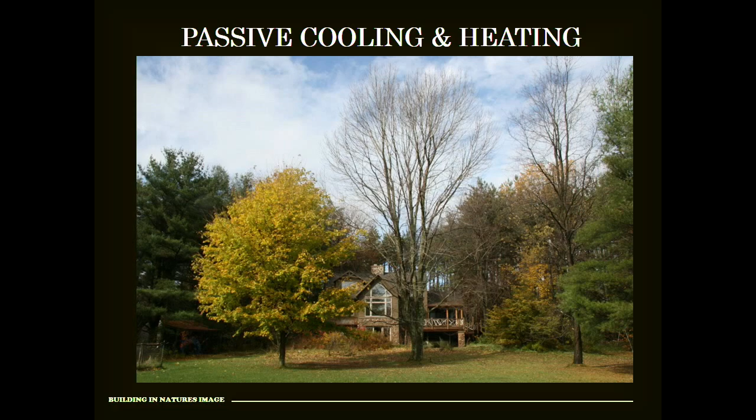We get to the point where you can see the green ash in the middle, and I'm sad to say I lost my good friend, this green ash tree that's been with me my entire lifetime there - it went the way of the emerald ash borer. I did everything I could to protect that tree during construction, but he's gone. For reasons unknown, how quickly they're moving and from what direction, but we're told now the emerald ash borer skipped over the Hudson River probably 15 or 20 years ago. We're just seeing the impacts of it now.

At this stage in my house, when I was living in it, I was 17, 18 years without a heating system. The sun heated and cooled my house, both. I had a wood stove, that was it. I was operating at about $1.17 a day electrically, but I wanted to do my part and say that my house is zero greenhouse gas emissions.

Just a few years later, I had the opportunity to put solar panels in. This is down around the corner, a remote location from my house. It's a 7.2 kilowatt system. It was $32,000 with the federal tax and state tax incentives, I got it down to $16,000. I did a lot of the work myself, so for about 11 grand, I'm in the game. I was close to net zero for quite a long time, and now I'm net zero.

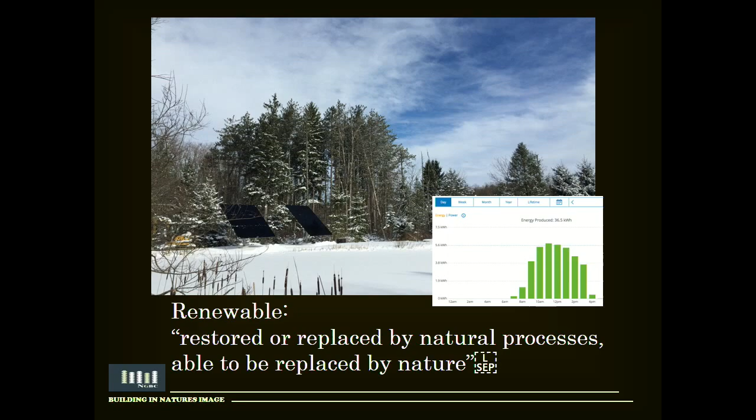So renewable, what do we know about renewable? It's restored or replaced by natural processes, able to be replaced by nature. Here it is the day after - zero production, right? So we really can't rely on it. I go down there and made up a special implement that I can clean the snow off, but there are days you don't really want to go down there, a day like this morning, but I do.

Imagine that on my rooftop and the rooftops of everyone else's house, we really don't have an opportunity to go up and clean the snow, ice, dirt, debris, bird droppings, or whatever falls on them.

So my house is net zero. I have my utility bills that prove it. I can prove it, I feel very good about it. But still, at certain points with net zero, I'm actually drawing from the grid during peak power production. My house will draw from the grid, even though I give back more than I take, at a peak time, so I don't reduce the capacity at the power plants. It's not having an impact there because of the certain times that I draw it.

So a whole different mindset's got to be ingrained in us when we're going to operate things and how things are actually going to be transformed. You know, my system's pretty good.

One of the things I've heard quite often in the green building movement is that most people don't like the looks of solar panels. So I made a point to use SunPower panels. They've taken all the diodes out and put them on the backside so they produce more, and they're clear, sheer black, with no patterns within them. So I oriented it right. I've got the reflection off the pond, cooling on the backside to keep them cool. The orientation, I can move them any way I want. And for maintenance, I can go down there and pull the snow off. To me, that's aesthetically pleasing.

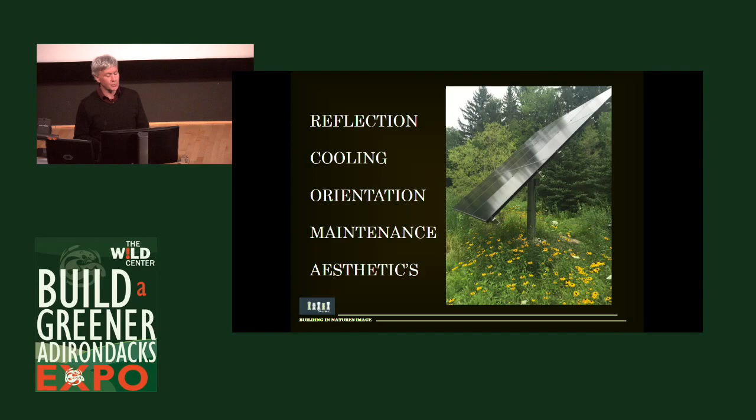But are they made properly? When we go back to 9th and 10th grade, learning about the periodic chart, we were told which areas to stay away from—lines 3 through 6 and 14 through 16—because these are the toxic elements. Stay away from these. But this is what we're making our panels out of.

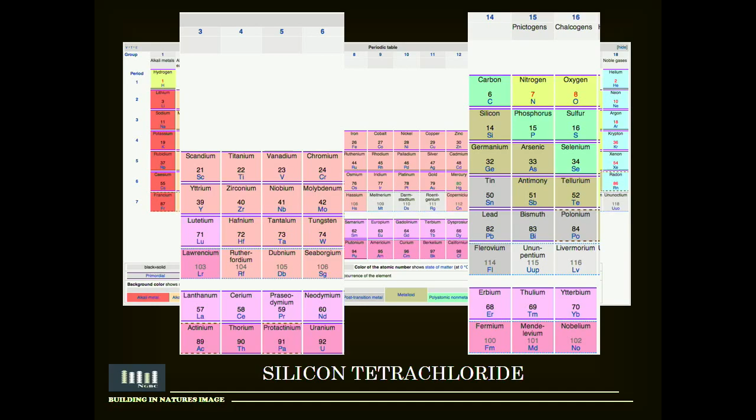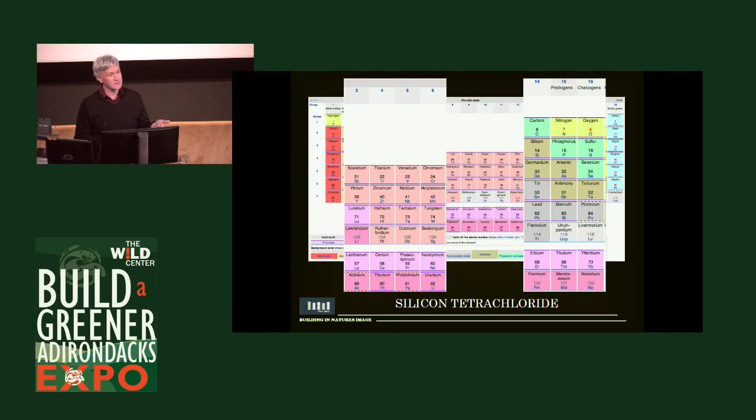Silicon tetrachloride is the byproduct. It's a very easily recoverable product, but it's extremely toxic. It reacts violently with water, and it only stays out of our water system if environmental regulations forbid it. Where the majority of solar panels are made today, there are no environmental regulations, so it is getting put into the waterways. And the way things are moving here in the States, if the EPA starts to be detracted from its main task, we may see it happen in the U.S. as well. So my solar panels certainly didn't come from the U.S., unfortunately.

So is net zero sustainable?

This is my daughter Jill. So Sally, this is Jill. We were talking about her this morning.

Jill spent 9 years in Hawaii. I just went over to move her. At the last of her time there, she was chief nurse at the largest capital improvement project in Hawaii, and this is it on the right—a mass transit system. It was sold to the public, funded by the federal and state governments at high levels, because it was going to bring the islanders in from the center of the island down to the downtown city, so there would actually be a benefit for them.

So when I went to move Jill from Hawaii to Portland, Oregon, we had a leased vehicle. The easiest way to get rid of a leased vehicle on an island is to try and sell it. We did it, took a little while. The third person who came was an older couple in their late 50s, who had never left this one island, not even to go to the other islands.

We were sitting on a park bench one day waiting for a leasing company to call us back, and I said, it's got to be really great to have this mass transit system—you live so far out, it gives you easy access to the inner cities, right? And they said, Kevin, over in Hawaii, they talk story, right? So you learn that very quickly—there's not a quick conversation, it takes a while. So for the next 20 minutes, I heard about their mass transit and the fact that it wasn't meant to bring them in from the inner islands down to the city.

So I started looking into this, and it's the first time I learned what the duck curve was all about. March 27th of that year, 2016, the largest solar farm in the United States had to shut down because the grid couldn't handle it.

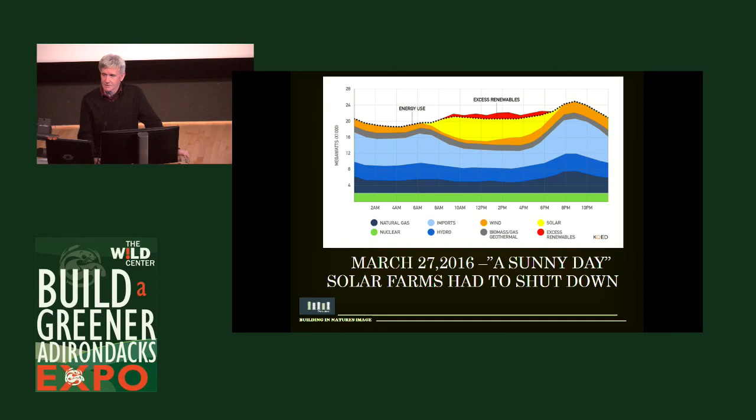So you start to say, okay, the island, they can't take their electrons and share them with other states, but we can in the United States, right? Well, maybe, right? Let's look at the duck curve, and this is what it is.

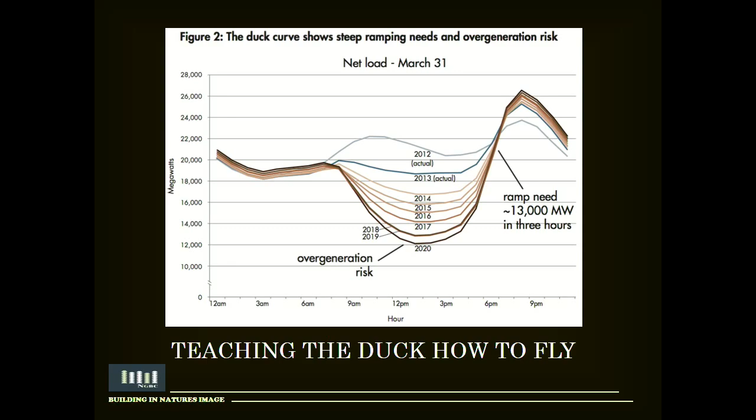There's an 8,000 megawatt ramp that comes when we wake up in the morning. You can see where the renewables take off, essentially when the sun comes out, from 7 to 3:30, somewhere in that range. Then it's got to ramp up by 13,000 megawatts as we all come home from work and turn our lights and computers and air conditioners on at home. And then it's got to shut down again. Well, our power plants can't ramp up and down that quick. So as electricity starts to take over, unless we teach this duck how to fly and flatten out, we're always going to be overproducing, which is an adverse impact on the grid. The grid just simply can't handle it.

And the reason they can't share - look at states like California and Oregon, where my daughter Jill moved to, they're zero coal. They want to be off, and they're 0.2% from getting there, and their goal is by 2018. So less than a year from now, they're legislated to go zero coal. The minute they share their electrons with PacifiCorp, who operates in the states of Wyoming, Utah, and I forget the third one over there, the minute they share, they're 60% coal. Electrons go both directions, right? So the minute they share, they can't meet their zero energy goal of zero carbon. So that's it in a nutshell about why the grid is not ready for us.

So the global impact of the built environment - we are truly global. One of the things I learned talking with the older couple, in their late 50s, was they were begging for the westerlies to come. It was three weeks late that year. Not only that, but the humpback whales were three weeks late as well. So finally, when the westerlies come, they blow all the humidity away, and then they plant their crops.

Well, what else comes on the westerlies in the state of Hawaii right now in a day and a half? All the black carbon from China. Two days later, it hits our west coast. Right now, it's fastly approaching 30% of the pollution on the west coast coming from China. When I hike up Whiteface here, they have one of three monitoring systems, I believe, in the entire world, and they can track how much coal we're burning in the Ohio River Valley in 3 days, and in 3 weeks, they know how much coal China's burning.

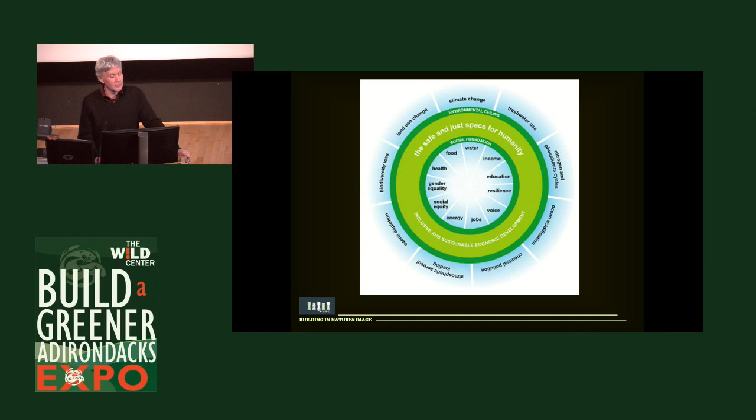So how do you do it? How do you get and stay in there? Well, we learn from traditional ecological knowledge, and we're actually starting to integrate this into our universities now too, where they're starting to understand traditional ecological knowledge has the same footing and should be on parity with scientific ecological knowledge.

From the stars, the 7 sisters, the Pleiades star system - long time ago, the Peruvian farmers every 4 years climb to the highest peaks. They literally look 400 light years off into the distance. And they will plant their crops and select which crops to plant based on how light or bright the 7 sisters are. So our scientists say, well, how do you do this?

How do you predict weather so accurately? So for 5 years, our top scientists went to these Peruvian farmers, and they followed them and tracked them. And they found out that they were actually predicting El Nino, something we've only learned about a couple decades ago. They've been doing it for 400 years. Ice crystals in the air is what's giving the brightness or obscurity of the Pleiades system, and that's El Nino - that's what our meteorologists track now to give us our weather predictions.

Because I missed one - Fukushima, right? So more traditional ecological knowledge. The hieroglyphics on these stone monuments that surround Japan have been there for 800 years. And when you translate them, it says: remember the calamity of the tsunami, never build below these monuments. 130,000 people did, and we all know the story of how that ended. So they knew this - sometimes it's what we forgot. It's already been known.

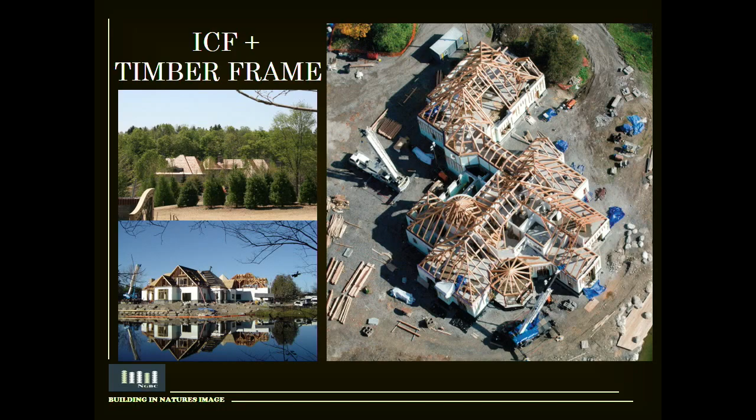So here's one of our projects. This was really a pilot project for a mall that couldn't get funded. So a good storyline here, right? How can we actually build something virtually and prove to the financial institutions that it can come in on budget and under schedule?

So it was a 17,975 square foot building. We were tasked with building it in less than a year, on budget. So we built it virtually. There were no paper plans allowed. Everything had to be done on the computer. Each of our guys went around with little iPads to do their work. And this is what we came up with for a system that was fast-paced and could actually operate at near net zero.

So what we took is we built an ICF structure, and we actually placed a timber frame structure on top of it. This building, the last utility bill I saw was - we didn't want to have natural gas there, but the owner insisted on it for cooking purposes. Her monthly bill for natural gas was $7.89. The monthly electric bill was $179. And I think you guys are fully aware of the service charge and transportation of our energy. So the actual electric usage for what you use is way down below $100.

For a 17,975 square foot building. So a lot of things we came up with - urban legends, I call this one - because as we start to move into the urban environment, you know, Paul Hawken came up with a great saying.

This is less than a year ago. He stood in front of a large audience and he said, before each and every one of us goes to bed tonight, 180,000 people have moved into the inner cities. That's us. That's in the U.S. And it's happening in Syracuse, New York. I see it. Every one of our old buildings is getting repurposed where we used to actually build things. We're putting people inside these places right now. 180,000 people each and every night, and this is happening.

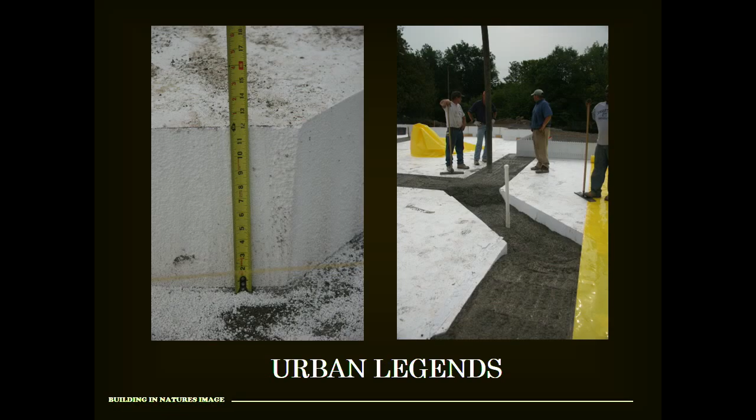So as we start to build in the urban environment, we're starting to actually see urban soils. So this 17,000 square foot house was on a brownfield site that we took down, but because we had urban soils there, we didn't know what it was. We had unstabilized soil down to a depth of 9 feet in some areas. So we had to excavate it out, bring structured fill in, put it in 8-inch lifts, have a structural engineer do the compaction testing for us.

So as we start to get up towards the surface, I started to calculate all the fees involved there. And I said, you know, I can actually put foam under this house that'll be not just for insulation, at less cost than I can put structured fill under this house. And I can start to begin with this concept of floating houses. And yeah, something as big as 17,000 square feet that was all concrete, we can float quite easily.

But what we came up with as well - if I can buy for $4.20 a square foot a foam block that's 12 inches thick, I can actually make all my footings out of it. And golly, you should see what the guys had to say when they came home at night and their knees weren't sore, because they're actually crawling around on foam, not on the hard ground or in gravel. So we actually set these foam blocks in place, laid out the footings. These are the spread footings here I'm showing you. Cut them out with electric chainsaws, take the waste and grind it back up for recycling.

And actually poured our concrete. This was a difficult project for Josh and I - we had a pretty hard-driving owner who wanted this done on budget and in less than a year. As he watched 18 masons drive off with their trailers full of wood formwork, he saw $14,000 of the budget go away with it, because we actually poured these footings in less than 4 hours. It was that quick - we just set the pins, snapped the lines, cut it out, and poured concrete.

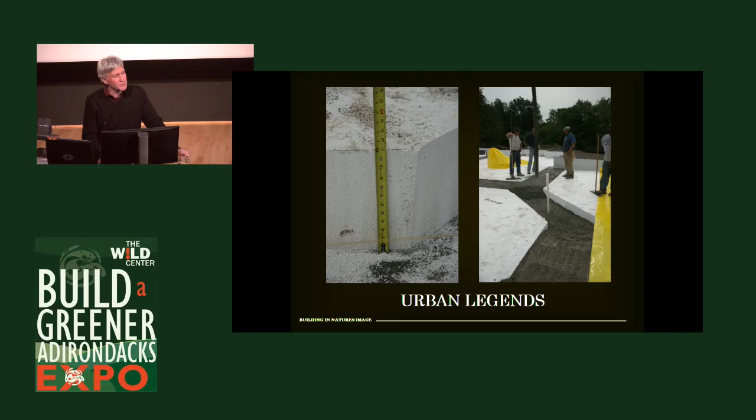As we're pouring the concrete and the spread footings here, we're ready to pull the gas-impermeable vapor barrier on top of it. And that afternoon we were literally laying the hydronic heat pipes in the concrete to be poured that evening. So we were moving at a very fast pace, and this was less expensive than bringing the structural fill up.

Here we are at the peak. So the thing you really look for here - if you can see this area, we actually took the 12-inch SIPS panel, and over on this side we're putting offset brackets so our overhangs are offset for the structure. So we literally married the ICF structure coming up with a 12-inch SIPS panel coming down. They came together - you saw what we did underneath with 12 inches of foam.

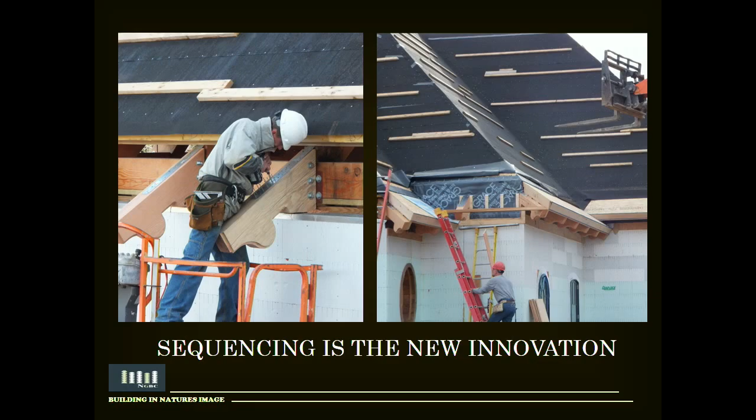We used a Quad-Lock system where we actually placed another 4 inches of foam in the ICFs, giving us a wall assembly of R43. We poured our concrete inside that, then married that wall system to a 12-inch SIPS package. So we literally enveloped our entire building and exterior skin with its insulation package, pretty much like a Golden-crowned Kinglet. And a house that's close to 18,000 square feet is operating at net zero.

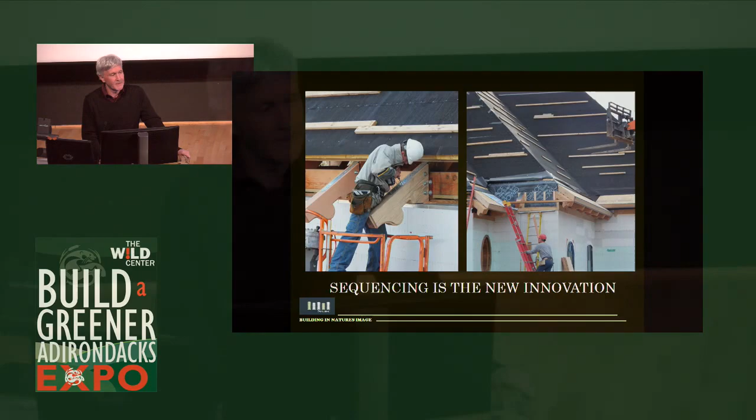Our blower door testing alone, we're at 0.76 air changes per hour in this big of a house. And the keys were looking at stuff like this - integrating it so there's no breaks in it at all.

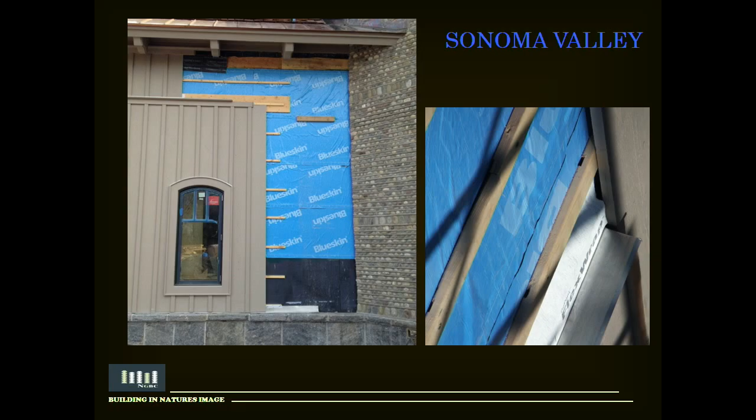This slide's pretty special to me because I went to Greenbuild in San Francisco maybe 5 years ago. At the very last minute I decided, Kevin, you're in the Sonoma Valley, you're not going to go for a wine tour. So I signed up, found out they're all busy, and got some guy for like $79. He showed up in an old Volkswagen van with a tape deck playing. I'm thinking, what am I getting myself into here? The first place he took us, there were 2 Canadians in the back seat, 2 people from Michigan - we're talking Green Bay Packers against the Minnesota Vikings, fighting before their first glass of wine. I'm sitting in the front seat with this knucklehead, and he says, yeah, I used to play in a band on the Mike Douglas show. Sure enough, there he is on YouTube playing. I go, what happened to this guy? So anyhow, we pull up to this small white house, and who would have known it's a vineyard? Out the door comes a 25-year-old lady in very short pants, because the people in the back seat let me know all about that very quickly.

And I'm thinking, all right, what are we going to learn in this and what the wine's going to be like? Oh my goodness, I've never had such an education before in my life in such a short time.

She came down and the first thing she said was, I want to show you our vineyards. They're only 1.5 acres, but as they go from the base of the mountain they rise up over this field, and she's pointing them out to us. We go through 28 climate zones. I think to myself, the EPA says there's only 8 climate zones in the entire U.S., and she's telling me there's 28 climate zones in that 1.5 acres of vineyard.

When they pick their wines from the lowest vine to the top of the vine, as it comes up and over this very gradual slope, it amazed me. And it taught me two things. It taught me that, golly, we look at different orientations of our buildings in a horizontal direction. We've never thought of a vertical direction. Well, here we are, right?

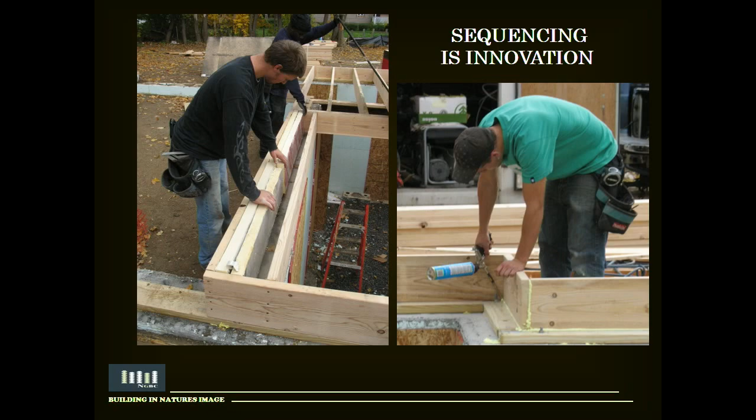And we get to learn things like this, that until we start to change the way we think about things, you know, sequencing is the innovation, right? So our framers need to be the air sealers. They are the people there in place that see it and can seal it. It's not the air sealing contractors and insulators who have to come in afterwards and find these outrageously expensive products that are off-gassing at times if it's not installed right. But there's times when they can't get into these areas as well to seal them properly.

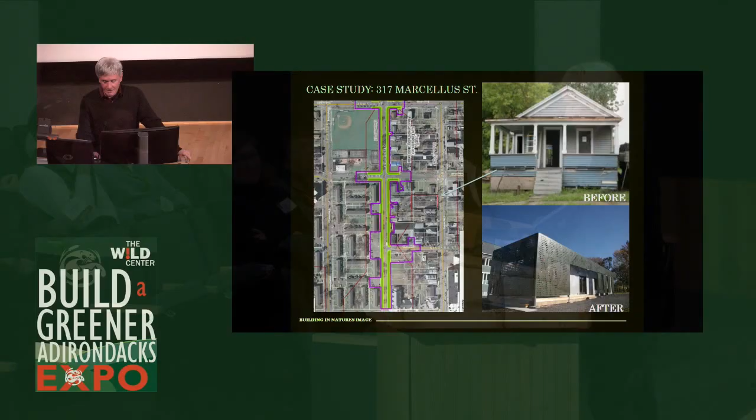But I'd like to introduce you to a case study here. This is 317 Marcellus Street. I think we end at 10 o'clock, is that right? Okay, so I'm going to speed up a little bit here.

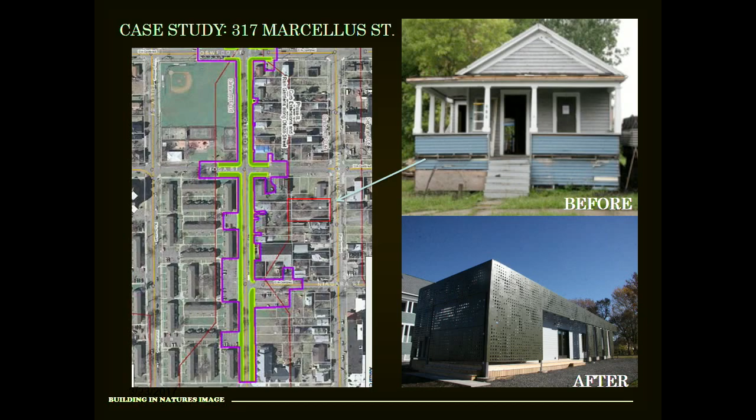So the case study is this house on the upper right. $41 million went into this near West Side neighborhood. It was to reimagine, reinvent, revigorate, whatever you want to call it. It's the before and the after. The after is on the bottom here. It shows where we are in this inner city, and it shows a new way of getting to that net zero. So the ecological deprivation, degradation, and social deprivation - how do we fit in there? Well, let's go back in time before we get to pre-European settlement.

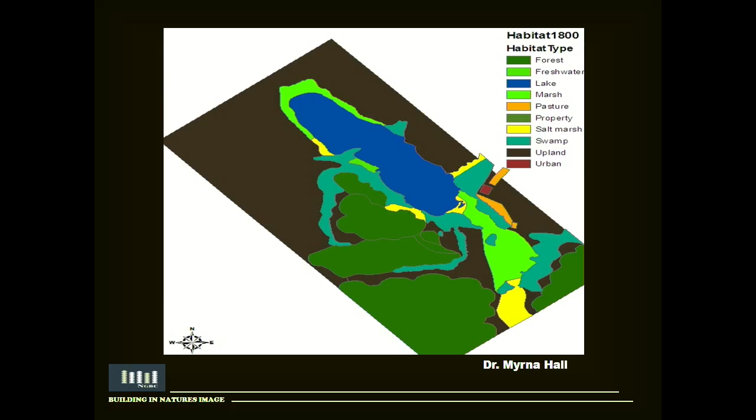We go find these old maps. We get these from the Historical Association, sometimes from the local colleges who have this stuff. We locate where the house sits. We go back up to the colleges. We locate these old vegetative maps done from scientific and traditional ecological knowledge. So we're tapping into the history of our ancestors here for answers.

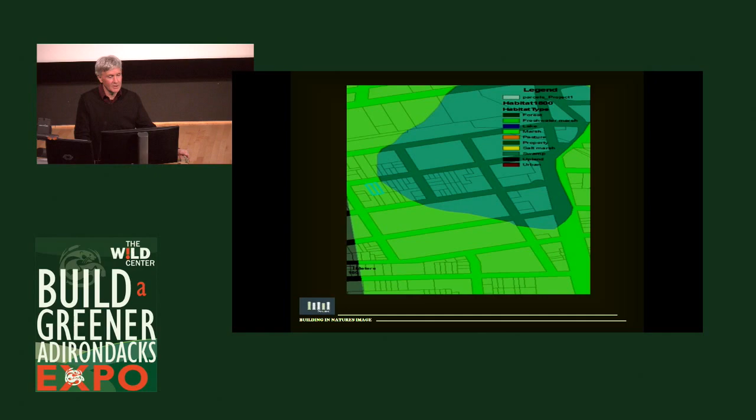We overlay both maps, the street grid with the vegetative grid, to understand what the performance is. We create an algorithm of what those performance metrics are from water, carbon, soil, albedo, solar. This screen would have to go clear across the entire screen to show you the complete algorithm, but I put the high ones out there. So we identify what was sustainable on that site before we put a house there.

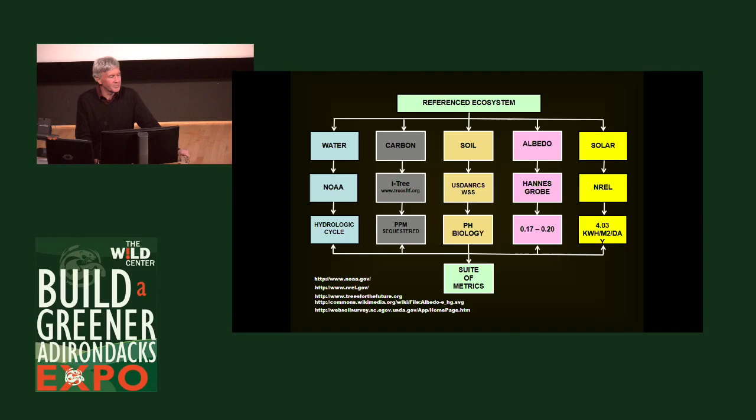How do we do it? There's a new tool that Dow Chemical actually came out with. They partnered with Nature Conservancy. It's called the ESII tool. I put a YouTube link at the top and it shows you how to do it. It can actually go on site in real time and tell you how that ecosystem is performing.

And if we can create a house that performs to the same standards of the ecosystem in which it's going to live, we're inside that band. We're in the rhythms of nature. This is not net zero. This is completely different. This isn't zero energy. This is life, and this is where all life survives, and this is where our buildings should be going.

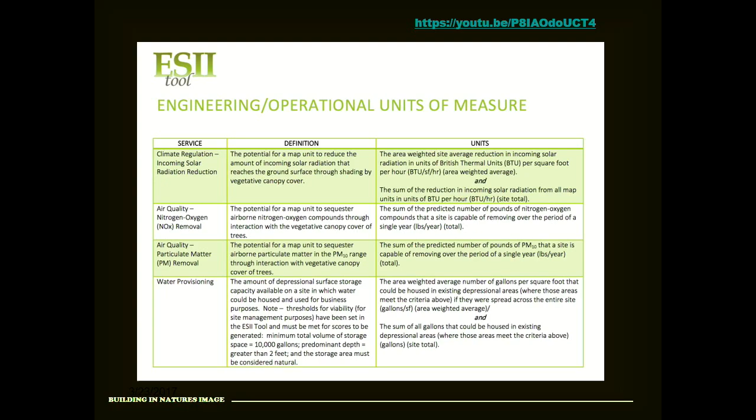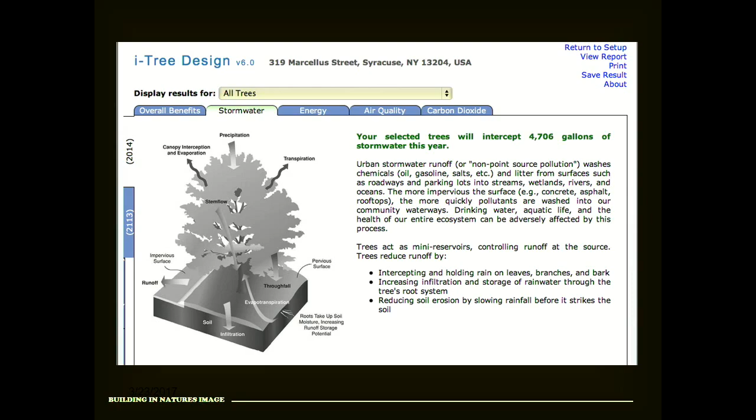Here's one of the things that we came out with. This is iTree design. This is telling us that the trees on site before we got there could intercept 4,706 gallons of water and purify it, whether through evapotranspiration, taken up into the system itself, through the rhizomes on the roots, or literally living within the vegetation.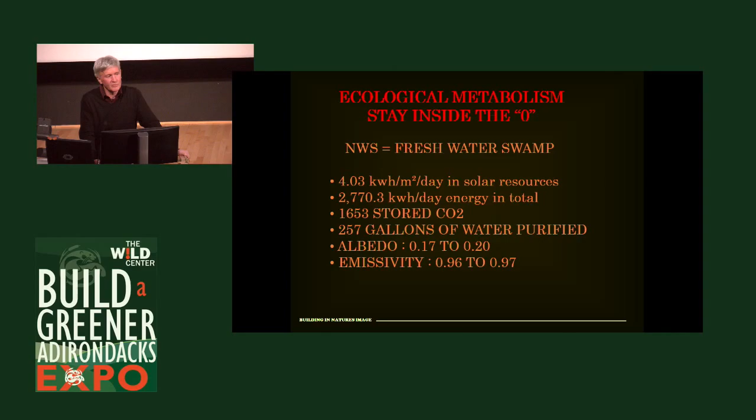It's pretty easy. We can establish the ecological metabolism. All these facts are easy, and they're easy to track. They're all right before us. It's how we really should be measuring the performance of our house, not so much looking at the electrical bill or the energy use. It's really how well the house performs and fits within nature.

This is how we do it. We're doing seed bank, we're doing boring. We're actually in the middle there. Holly's just clipping off leaves so we can dig our stuff up with an excavator, but as soon as we get close to our vegetation, we're actually hand bending the roots out of the way. If they're in the way, we'll strip them and place a mycorrhiza mat right on the root system to stimulate root growth so we're not stressing the tree.

Then we identify everything that's on site. That's Rick usually being told his site is just literally taken over with the swallowwort. The swallowwort mimics the milkweed. If the monarch lays its larvae in the swallowwort, it's toxic, and right now there's a 50% mortality factor for the monarch butterfly. So he's pretty disappointed in the lot that he chose, to say the least.

We deconstructed the house. We didn't demolish it. You can see some of the lumber over here. These were actually in that 1,700 square foot house right here. Look at the beams we took out of it. These were the mud sills. And what did we do with this lumber?

Put it right back in the house that was built there. We literally took those beams, we milled them, reshaped them, and put them right back in the house that was built where the house that we deconstructed.

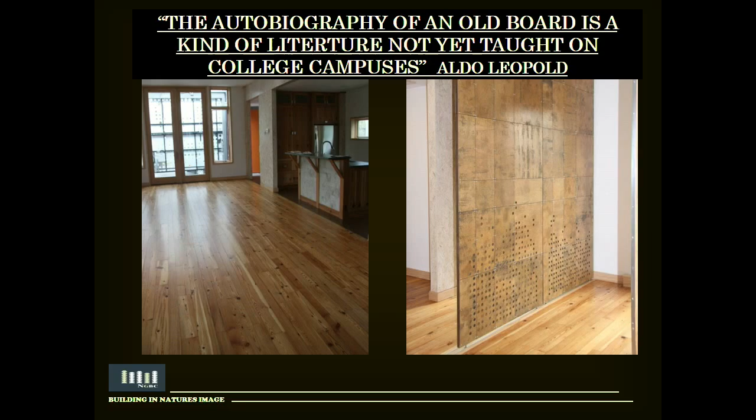This is what Aldo Leopold calls the autobiography of an old board, the kind of literature not yet taught, right?

This is what it looks like today. The holes are meant to mimic a forest canopy. Josh and I feel that we should do that with real trees, not with stuff that comes out of an architectural department, but still when you're inside it's a pretty unique system, and that's on YouTube as well.

Eric Sanderson has done this in Manhattan. He's mapped Manhattan. This is part of the E.O. Wilson project: leave half of everything alone, basically for biodiversity.

Green Demonstration House, this is in 2004. I'll just go a few minutes here, but the biggest thing we learned on this house — we had 42 data loggers in it, and we knew everything, when the hot water heater came on, when the furnace came on, everything.

But we learned about this house the most. I had a $9,000 high velocity air conditioning system in it, and it was only turned on 5 times in 3 years, because we left the trees in place.

These guys here are the ones where we bent the roots around and created the mycorrhiza treatments for.

Modified optimum value engineering — when people tell me that green building costs more, I say, well, it really depends on what you look at. In this case, I saved close to $500 just on the cost of the lumber by taking 14 headers and 88 studs out.

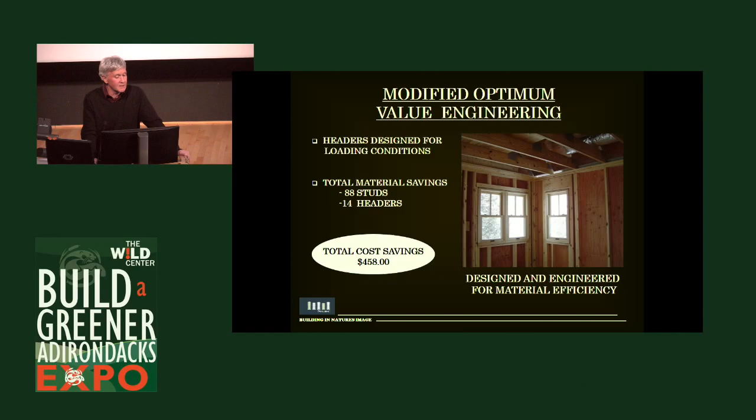This is what it looked like, right? There's the 88 studs I took out. So instead of over 100 square feet of R3.5 solid wood structure with thermal conduction from inside to outside and outside to inside, it's filled with insulation. So this house, forever and ever, every day, every week, every month, and every year, will always use less energy with one simple method that actually saved me money.

And that year I built that, 2004, there were 1.9 million housing starts. If every house did that, this is the amount of forest that would be set aside, not harvested, because that's the board feet of lumber it would take.

And if you think about what those trees are doing for us for free — I know most of them are on vacation right now, they lost their leaves, they're not photosynthesizing for us now — but they're producing the 20% of oxygen in our air, right?

So if we take one breath from our trees, the second breath is from our oceans, right? So this is that ecological deprivation outside those planetary boundaries. Let's understand where real life comes from.

Nature's performance — I mean, can we harvest rainwater? The Hubbard Brook Foundation, right up the street here in New Hampshire, has the longest study ever following a drop of water from when it comes from the sky to where it ends up. And here it is from the northern forest: 40% gets evapotranspirated, 30% is uptake in the vegetation, 30% goes to the aquifer.

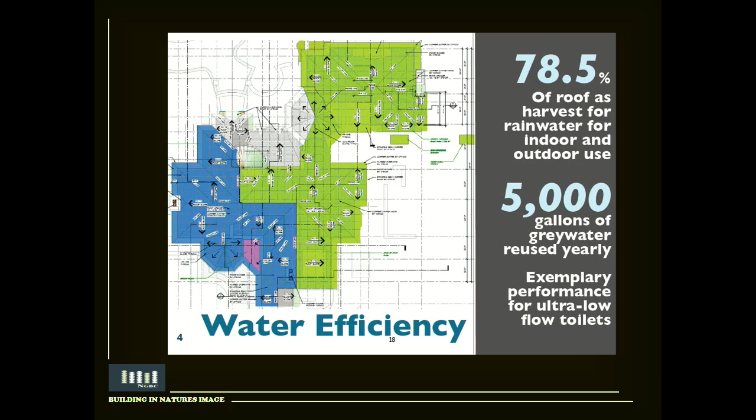How do we do it? We map our roofs — we're back to the 18,000 square foot house. We map every direction of it, and we divert the water where we need it. If we want to slow water down, teach it to walk again, we put living roofs on that can actually deflect water and hold it. All our studies today show that these living roofs are performing as designed.

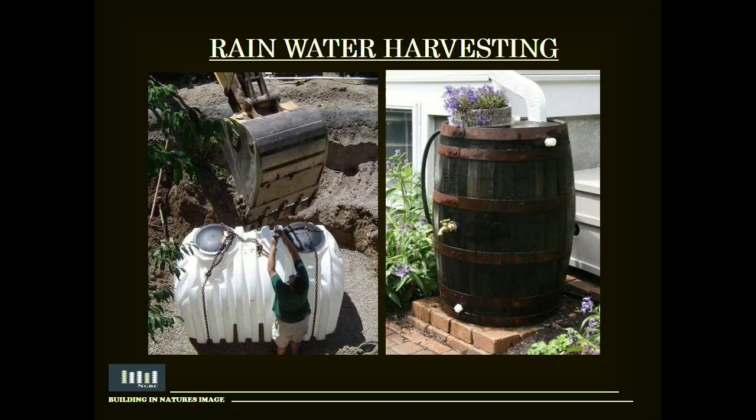We can capture it in cisterns or old whiskey barrels, however you like. We can capture our gray water system. We couldn't get our purple pipes up here, so we actually color-coded them ourselves. We're directing our gray water into this pre-cistern here — it's nothing more than an aerobic digester, then a dosing station, and we put it into here. We also tied our solar thermal system into that.

So when our solar thermal system is overheating on our roofs, we literally just grabbed a 3/4 inch roll of copper, set it in there, tied it into the solar thermal system on the roof, so rather than releasing that energy to the atmosphere when it gets too hot, we capture it and put it down into the gray water recycling, holding that heat in the earth. It's like its own little geothermal system.

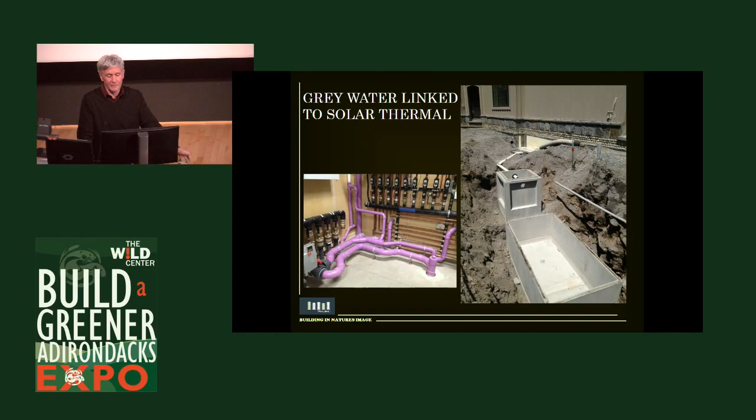Then we take it back up into a 118-gallon hot water tank that's just sitting there, and we manifold that to the geothermal system on the other side, so we have two 118-gallon tanks of storage, one coming from the gray water and one from the roof. That's how we get to near net zero energy with an 18,000 square foot house.

Innovative water practices on the shores of Skaneateles Lake.

You're only allowed to build an impervious surface on 10% of the land, so it doesn't matter if you're the best baseball player in the world who just purchased a lot there. If you buy a $3 million lot and take a camp down, you can still only build on 10% of that land. So this is the driveway, what it looks like.

You can see the snow being plowed up. This is what it looks like the first day of spring. So this is a grass paved system, so we're actually infiltrating all the water into the soil, letting nature clean and purify it before it gets released in the Skaneateles Lake. And because we didn't put an impervious surface in for a drive, we get to build this house a little bit bigger, right?

Don't let energy go. If we're going to create energy, don't let it go. So this is simple. Where we have our boiler system here, this is the only thing that's heated in the house. It's a modulating boiler. It goes from 25,000 BTUs up to 127,000 BTUs, and it's regulated by an outdoor set temperature.

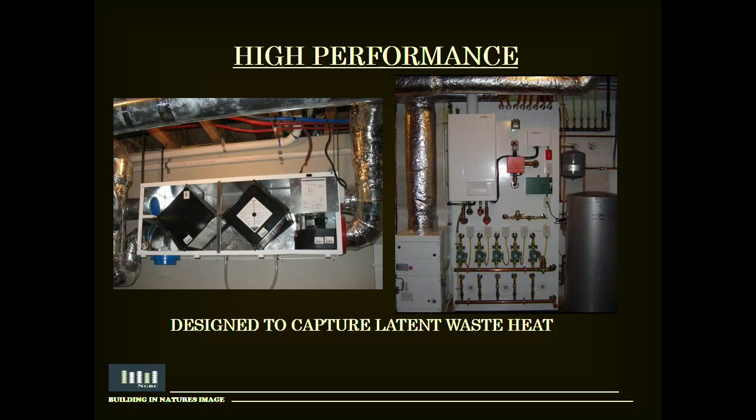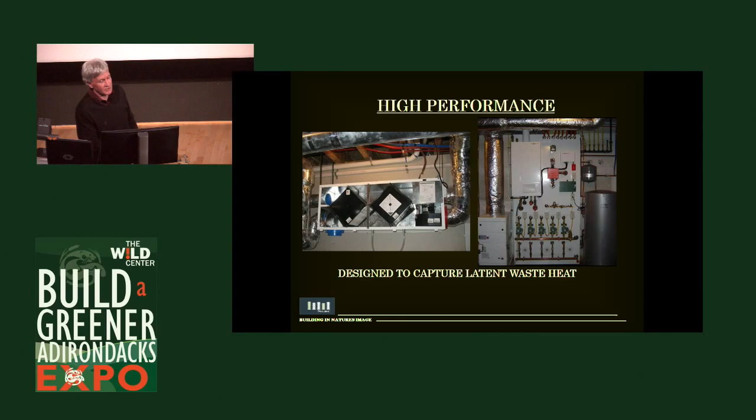But what we did in this case, we literally tied it in through just convective looping. So all the pipes that you normally see with a hydronic system is actually encased in this box here. And then we take it out the top and we put it through our HRV system before it goes through the house with one switch, so the switch operates on a temperature.

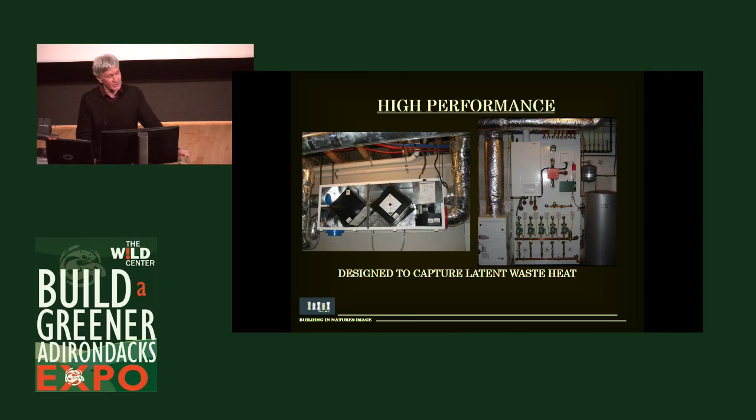We're seeing a delta T of 49 degrees. Can you imagine that? So when we talk about squeezing the delta T in these processes, if we can take 49 degrees just out of latent waste heat from our boiler package and put it into the house, this is how we get to net zero and still remain within that very fine band of where all life should be.

The big project, probably one of the biggest things we did, was an adaptive management system. The waterway was polluted, filling in, with all sorts of problems with phragmites and everything else there. So we harvested an old barn less than 12 miles away that had old growth cypress in it, from a sauerkraut mill that was shut down.

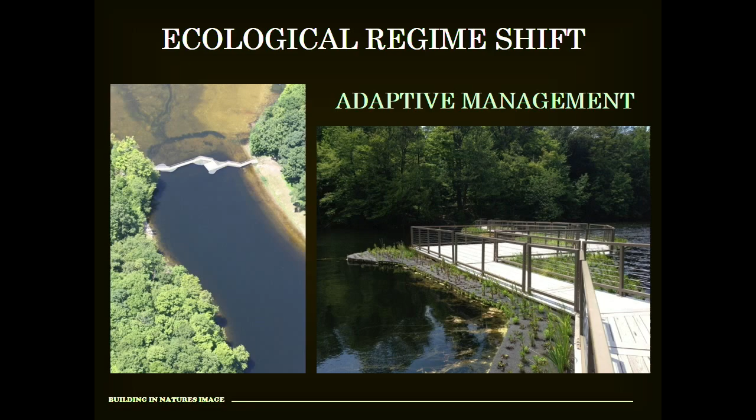So we took these boards out. I learned about it from one of my students - hey Kevin, you want to come and get some of this stuff? And I was buying it, when we started, for probably $1.25 a square foot. Sent it down to New Orleans, found out that when it was actually harvested, the boards that we built this walkway out of are 250 years old.

And because it's cypress, we can put them right down on the water and nothing happens because they live in the water, right? So a 250-year-old walkway that suspends root systems throughout the waterway down 304 feet stops the sedimentation from coming in, and it's purifying the water, performing at about the same rate as a tertiary treatment plant, the rhizomes on these roots. So his water is always going to be clear. We're actually purifying and cleaning the water before it gets to his property.

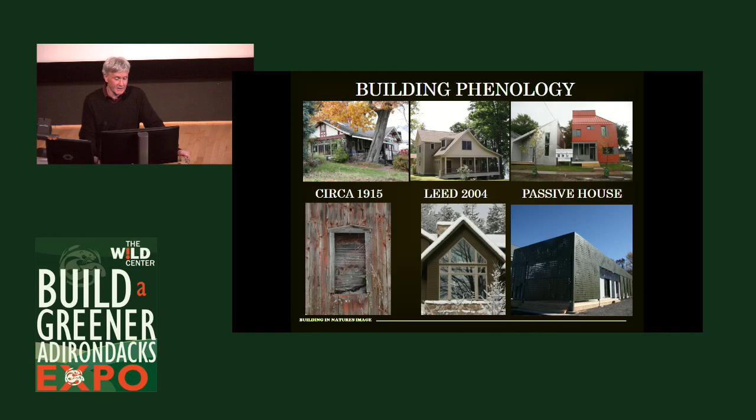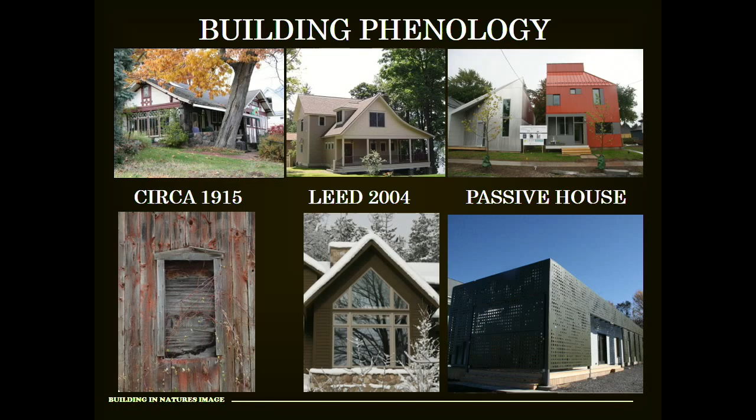So building phenology, as we start to go through what we learned in the past for today, I can tell you it's not just the flora and fauna that has phenology, it's our building systems too. Where I come from, in the ecological world, 30,000 snow geese packed their bags and headed south. They stopped at the Montezuma Wildlife Refuge and they never left this year. There were so many of them, we conducted a survey, brought all the wildlife biologists and counted them.

30,000. Our red maple trees burst over a month ago. The sap started flowing in the eldest of our maple trees about 6 weeks ago, drip drip drip, down into the old pans fashioned by our parents, but never before dripping this soon, right? When I walked out to my driveway 5 weeks ago, the first thing I saw and heard were the spring peepers.

So where are they today? Cherry blossoms came 3 weeks ago in Washington. What's that do to our pollinators? What are they going to do when they arrive and the blossoms are gone, right? So with all these systems, we have to really start thinking a little bit differently.